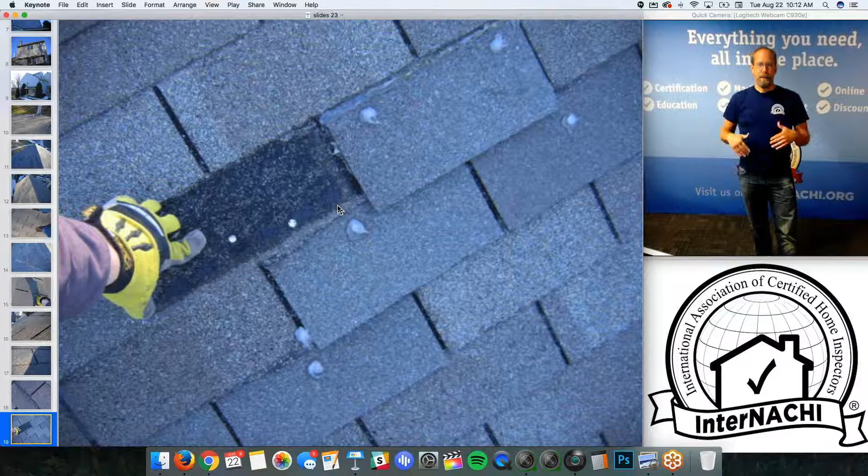As you can see, we have defects. They're not material defects, there are a couple shingles that are in poor shape, but you need a professional. So those are major defects. I'm looking for defects, and I want to make sure my client understands the degree to which the defect is, right? Material is the worst, major needs a professional, minor needs a professional or maybe you could do it, cosmetic is like a blemish.

These are major defects, and the shingles weren't even installed correctly. As you can see in that shingle, one of those fasteners was installed, well, they're not spaced appropriately. That's not where you install a fastener. You don't install fasteners 4 inches apart on any shingle, not even wind driven. And that fastener is installed in the adhesive strip, so that's a poor location of a fastener in a 3-tab asphalt shingle.

I like to communicate with pictures and video more than words. If you take a look at my inspection reports, you can download samples of them. My reports have a ton of pictures, because a picture is worth 1,000 words.

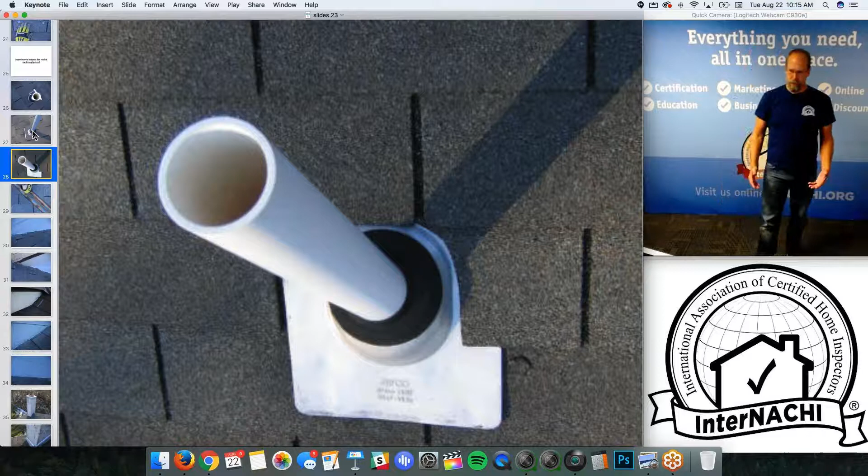So there's the penetrations - that flashing is not installed properly. If you take a look at it, the left side of the flashing jack is actually open to water penetration. There's a hole 2.5, 3 inches from that left edge of that flashing, the metal flashing. Oh, I wonder if I have a pen - I've practiced this before, but usually I'm not very good at it. There it is, cool. So right there is where I'm talking about.

So there should be an asphalt shingle tab lying over that area. It's not a really great position from the roofer of that flashing. The standing seam has a little bit of corrosion - I'm not worried about it.

The other type of flashing that you need to look at is - what did we do - flashing around the vent pipes, valley flashing, and now step flashing. Step flashing is listed in the standards of practice, and you're required to inspect for it. I see step flashing, but I also see white silicone slobbered all over the step flashing.

And when I see that, poor workmanship, something sloppy, I put a smile on my face. I know I've got a problem, and I want to figure it out as much as I can. I'm not required to diagnose every problem I see, but I'm going to try to figure out what's going on, because this doesn't look right.

So you can see the metal flashing there in between the shingle tabs, but I don't know why. If you do metal flashing properly, you don't need sealant at all.

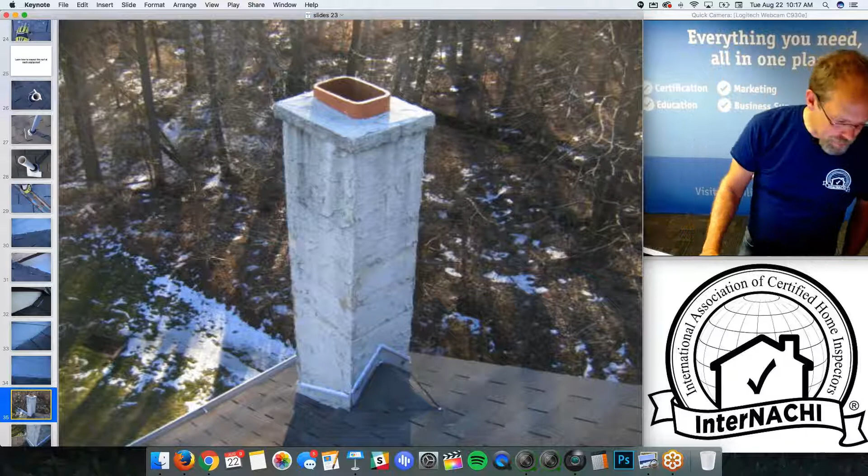We have a course on inspecting fireplaces and chimney stacks. I know that that's a fireplace chimney stack. Can anybody guess why I think that's a fireplace chimney stack and not a masonry chimney stack from a fuel burning appliance, furnace, or boiler?

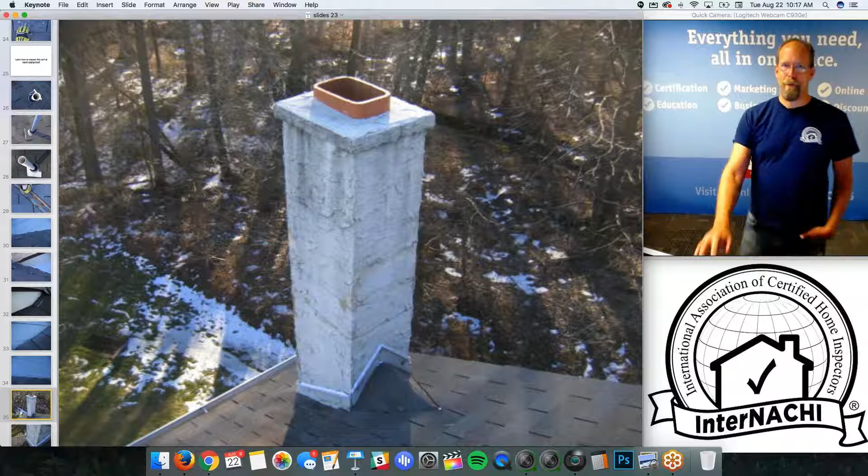Anybody guessing? No? Shelly, is it because it's over 3 feet high? No. Ceramic vent? Yeah, you're close.

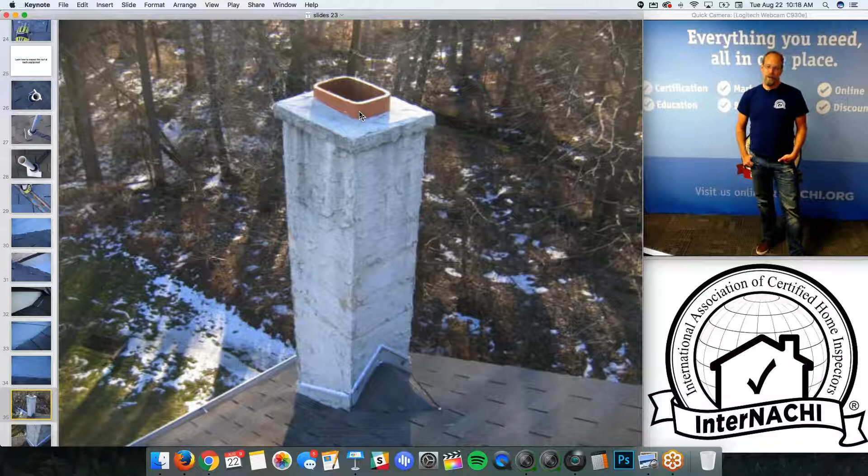Douglas - so the shape, it's actually the shape of the interior flue liner. The terracotta flue liner is rectangular, and that gives me a pretty good guess that this is for a fireplace chimney stack, just the shape of it. If you see a rectangular flue liner on a chimney stack, it could be a fireplace. This is a cold climate, so that makes sense. If it's circular or square, that could likely be a flue liner for a fuel burning appliance, a furnace, a heating system. So that's just one of the tricks - it's also in the course.

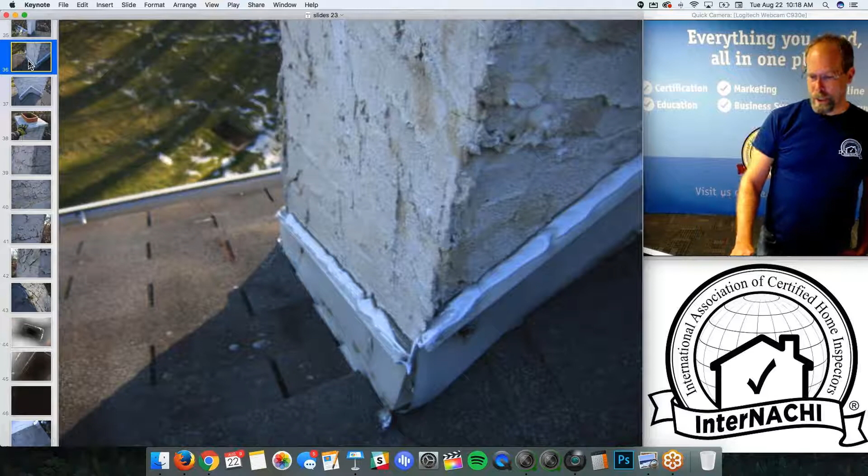The flashing is okay, but I'm not happy again with the white silicone. It doesn't even look very good. The wash or top cap on the chimney should be sloped - if it's metal, it should be sloped with a drip edge to kick water away.

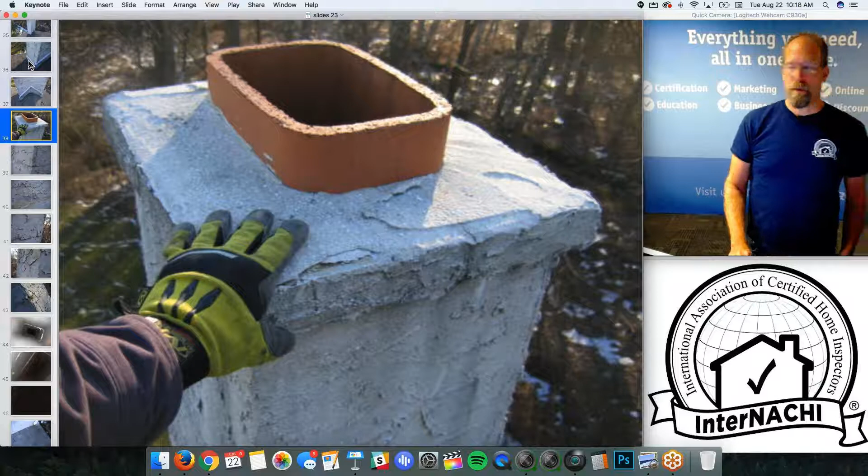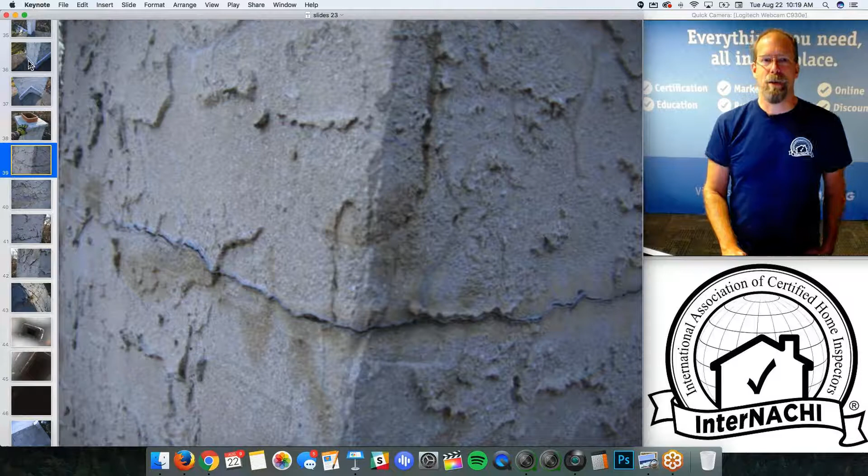There's some cracking of the masonry at the top wash, the crown, and also cracking at the mortar joints. I'm assuming this isn't brick because the cracks are about 8 to 9 inches apart, so this is probably a concrete block chimney stack. There's cracks at the mortar joints with efflorescence at each crack, and chunks of masonry popping out. This masonry is absorbing moisture through the cracks or the material itself, and through water pressure it's cracking the masonry on the outer surface, or because of the cold climate it could be freezing and cracking. Either way, it's a clear indication of water penetration, with efflorescence or salt deposits left behind causing structural damage.

So this is a major defect.

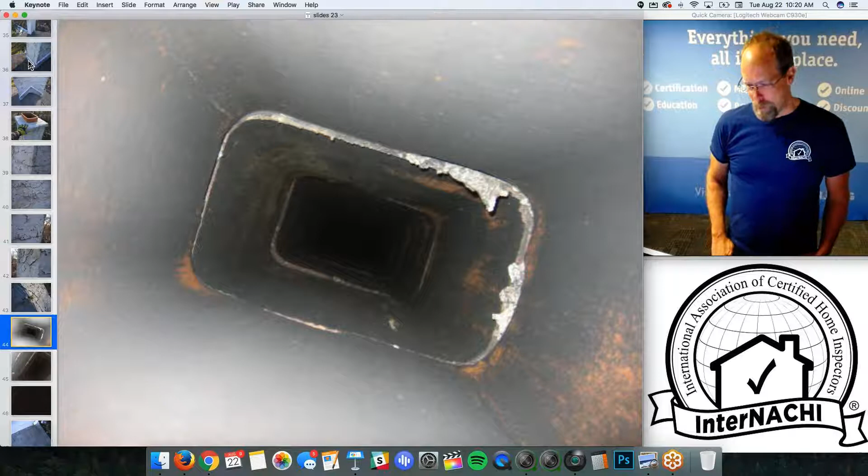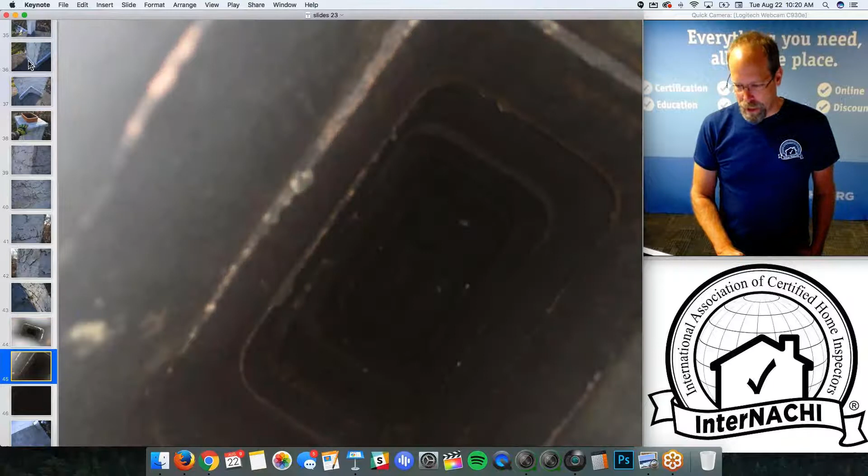The interior flue liner - you're not required, according to the standards of practice, to inspect any interior flue liner, but while I'm there I can just reach up, grab my digital camera, and snap a shot. Often I find a hole right on the side of the interior flue, or maybe a separation, a vertical crack, or a blockage. This one's fairly clean - I don't even see any soot or creosote. I try to zoom down to look at the damper or the throat of the fireplace.

So what I did was take a bunch of pictures of the roof, usually about 50 pictures just of the roof. If there's a lot of defects, a lot more pictures. For this roof we had some major problems - some shingles cracking, the chimney stack, the flashing. So I'm taking about 50 pictures, and I'll put maybe a dozen or so of them in the inspection report. I won't be able to put them all in.

I'll also do video - I used to carry two cameras, now I have software I use with my iPhone. It takes pictures and video. I take video of the roof inspection because I don't want anybody coming up on the roof, but I wanted to communicate my findings really well. So here's video of the roof.

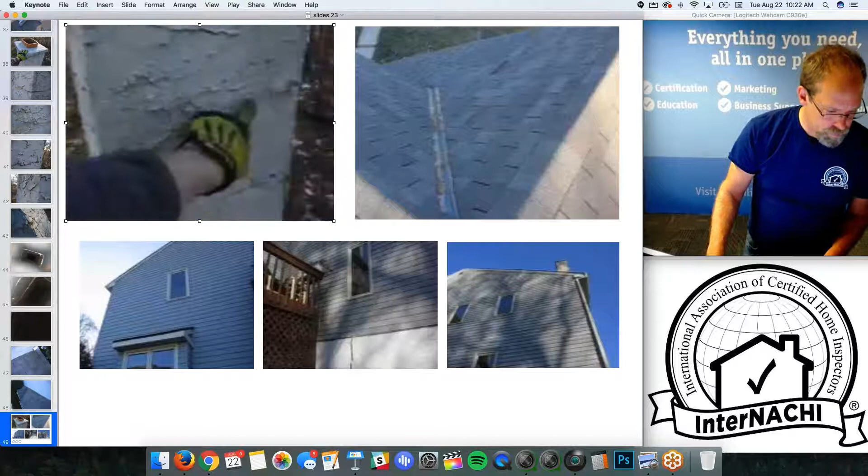There's the chimney stack - the masonry chimney stack needs some repair at the mortar joints. The stucco exterior, cement stucco, is cracking along all of the mortar joints. That could allow water penetration.

The asphalt shingles need to be repaired in several areas where they're actually missing. Looks like there's some water damage on the right there. On the exterior, there's a hole in the siding up there.

So I took videos of my inspection as well. At the end of the inspection, about two and a half hours later, I'd be in the kitchen. That's where I wind things up, get paid, and summarize everything and my findings. What I did was turn my computer around and play those videos for my client, particularly when their agent was right behind them, and let them view the videos.

After a few seconds, they realize that's their roof. They're not watching just any video, it's their video of their roof that they didn't get to see, because I don't take anybody up on the roof. That was part of my brand.

So I did a ton of pictures. I gave all of my pictures to my clients, and I did video and provided all those videos to my clients as well. Used to burn them to a DVD back then, then USB. Now it's all in the cloud with your mobile software. So you have to think about that as well.

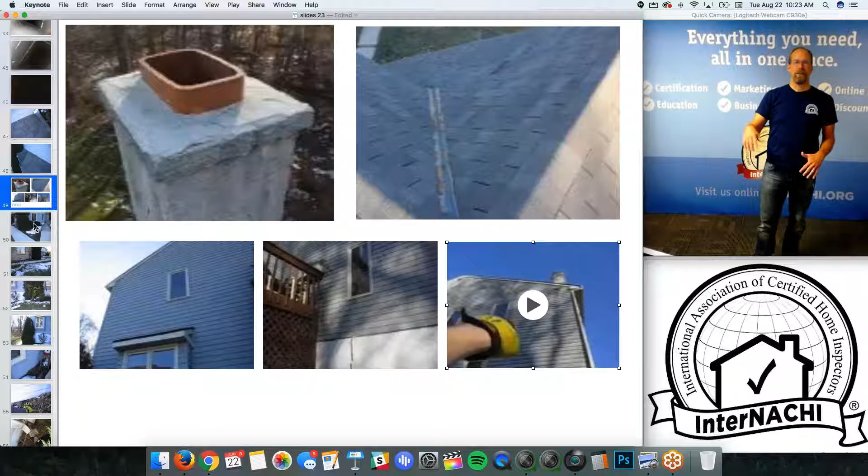Digital pictures were kind of new about 15 years ago. I think video is the same way. In about 10 years from now, people are going to expect a lot more video. In fact, I love the idea of a video-based inspection report. If you've been with me during an inspection or in other classes on software, you can see that as well. It's so easy to snap pictures, just as easy to do video.

So I'm done with the roof, right? I'm using my mobile device. I've entered my comments just by clicking and tapping the sentences that I like. Maybe there's some custom things I need to write in, like where the missing shingles are or how many. And then I'm done with my video as well.

As I write my inspection reports and take pictures, those pictures and video end up right where I was in my software. So if I was writing about the step flashing being gooped with silicone, in my software, I would take pictures as well.

And then I'm done with that inspection report. I can print it out later, I could email it, put it in the cloud, PDF it. But I'm done with that inspection. Before I step on my ladder to get down from the roof, I'm done inspecting, taking pictures, taking video of the roof, and writing my inspection report for that system.

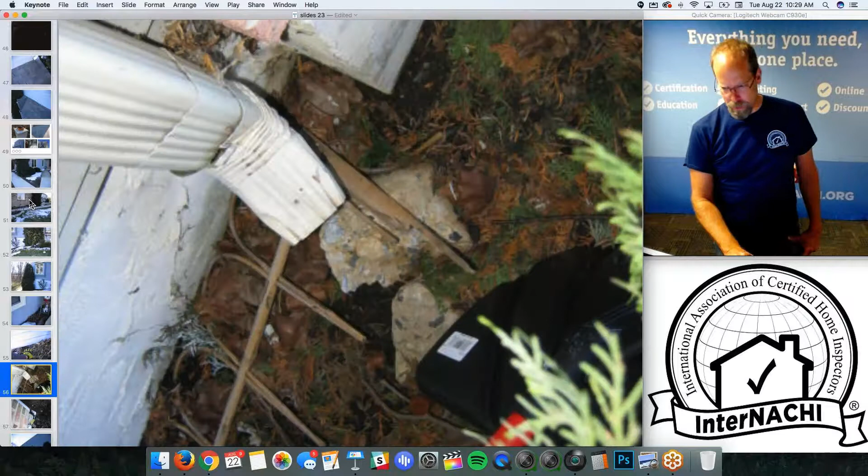I follow the downspouts. Remember how I followed the downspout from the upper gutter to the lower secondary level gutter? Well, here's the downspout at ground level, and it's not diverting water away from the house. During a typical rainstorm in Pennsylvania, hundreds of gallons of water will be dumped right next to that foundation right there.

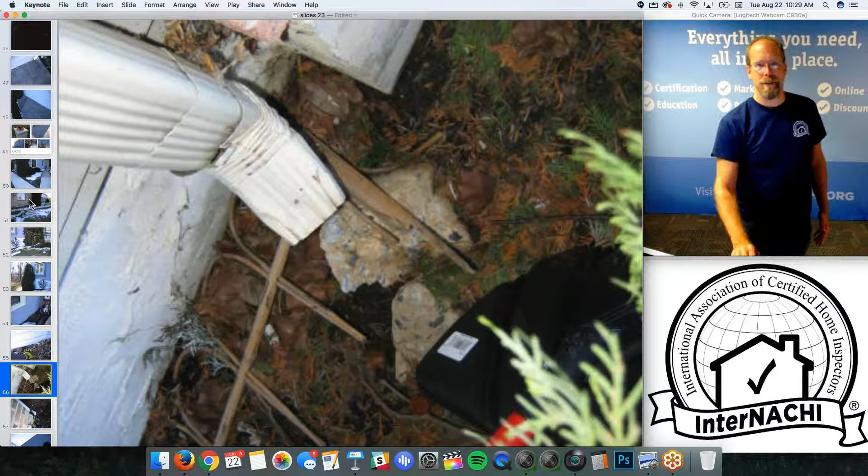So now I'm smiling, because I can't wait to get into the basement. I'm keeping in mind all the things I've found during my inspection — remember, roofing shingles totally blown off the roof. I'm going to look for roof leaks, and now I'm going to look for water penetration and intrusion problems in the basement.

And when you're looking closely, remember far back? Then you move in closer, and then really close, up to the point where you're touching things. And when you do that, you get to look at details like that — that's a pipe, about a 1.5-inch diameter pipe, going into the downspout, underground drainage pipes.

That's probably a sump pump discharge, I'm thinking, or maybe a condensate discharge. Something is discharging, so I'm going to keep that in mind as well.

And I'm looking at the exterior. Looks okay — for a 15, 20-year-old home, not bad. The siding looks pretty good. There are areas of wood rot, though, on windows that I can see, and I'll put that in the report.

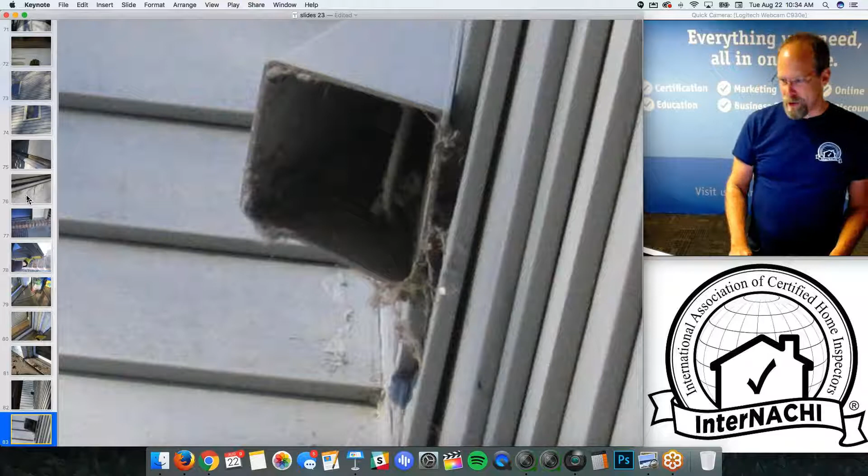Here's one: there's the dryer exhaust with a ton of lint, and it's not even closing. Often a bird will come and go right into the dryer vent and build a nest right in there.

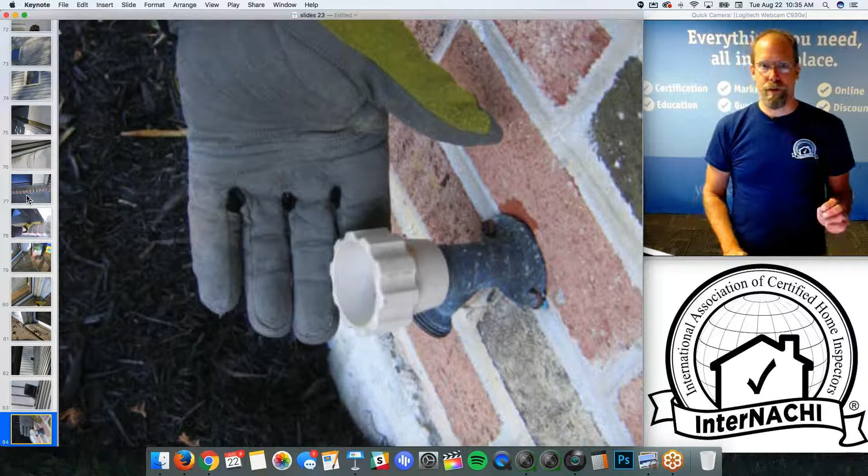Every exterior water faucet, especially in a cold climate, should be frost-free so they don't freeze and burst. Every receptacle outside should be GFCI protected.

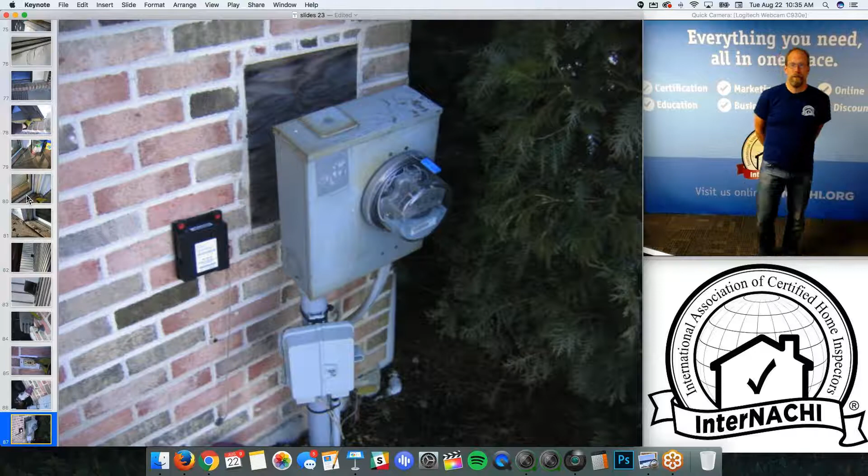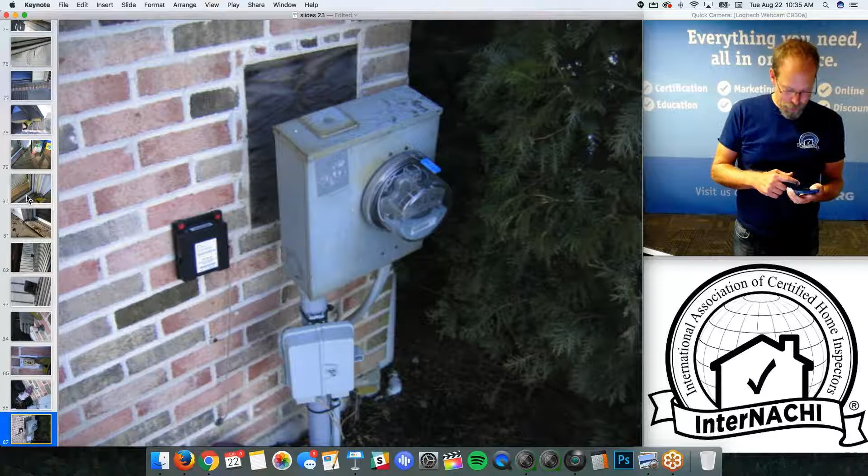Speaking of electrical, while I'm doing the exterior, a house is a system of interdependent parts—one part affects a lot of others. While I'm inspecting the exterior, another system comes up. No big deal, because I use mobile software, so with a flick of the finger I go from exterior to electrical. Now I'm organizing my software according to my inspection process. Typically on every home inspection, I'm outside doing the exterior inspection, then I flip to the electrical system, and the first thing I want to comment on is the meter.

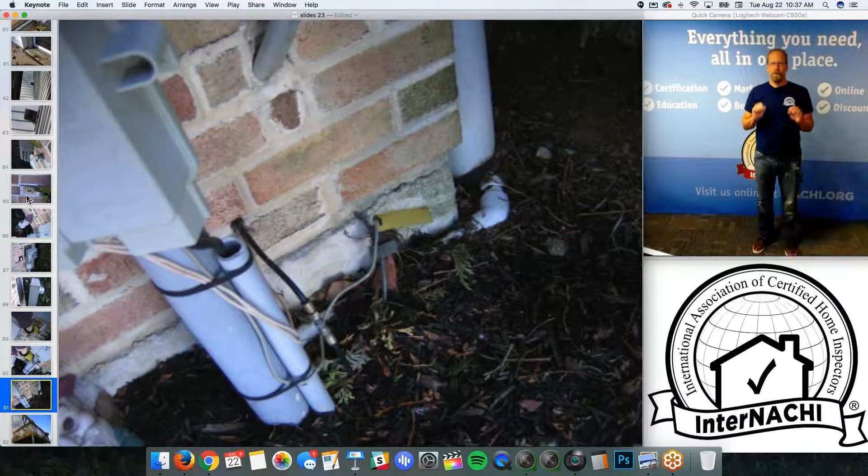Anything with the electrical system, I don't pull any punches—I want to make sure this house is safe. So this is a big defect. There's a line going into the meter, the main panel in the basement, 200 amps. There's an underground conduit which settled. We've got phone and cable. Some sealant is needed. I see a grounding wire, a grounding rod, and I'm done with that. That was probably a two-minute inspection of the exterior electrical system—a minute maybe. It's very easy.

I'm paying attention also to my time while I'm performing an inspection, and that should only take a few minutes.

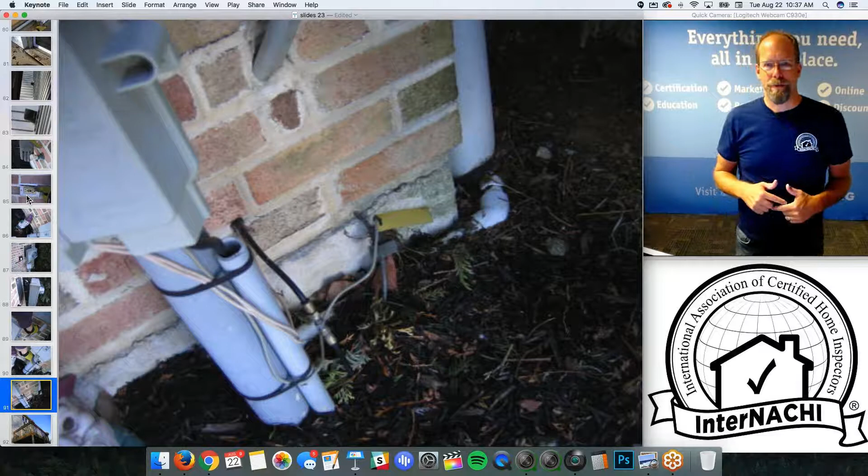Then I'm back to the exterior, and one of the major systems, one of the biggest things attached to a house is this, the deck. Often it's not attached well, and if it's not, it's really hazardous. So it's important to inspect the deck well. We actually have a bunch of courses on how to inspect the deck.

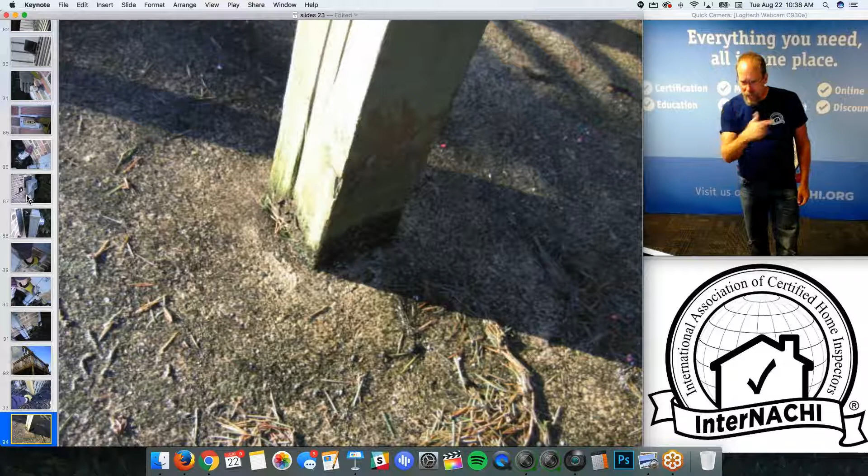The way I inspect it is from bottom up. I start from the bottom. Works perfect, I'm outside anyways, so let's poke with my screwdriver that I pull out of my tool pouch the very bottom of every load-bearing component of the deck system to look for attachment and damage. These are not attached and they're damaged. They're buried underground too. Now I'm looking for attachment to the house, and it's in poor condition as well.

You can't install a ledger board with nails. Why? Because they withdraw, they pull out. You can see a deck just pulling straight out. What you need is lag screws. It's okay, lag bolts, it's a lot better. Or designed attachment systems.

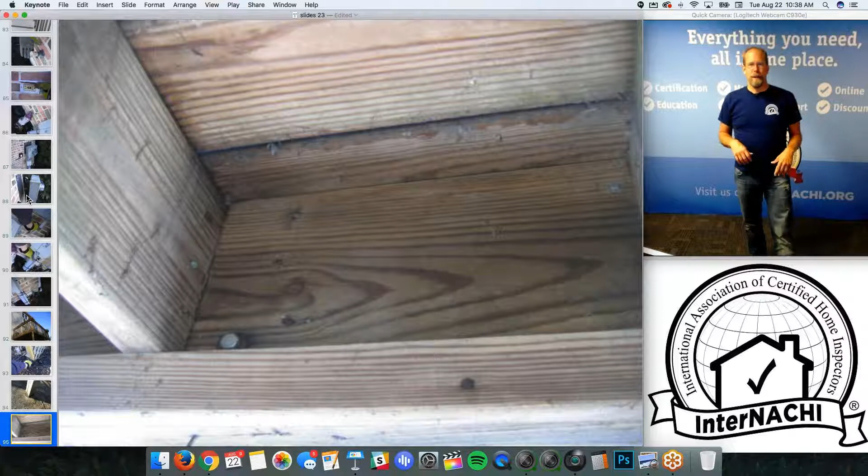You go to Home Depot and you take a look, ask for the deck area, and you can see you've got joist hangers, fasteners, lag screws, lag bolts, but then there's the best, which is a various amounts of different kinds of attachment devices to attach every joist to every ledger to every house structure. And that's the way I would build a deck.

Here we have a bunch of nails that can easily withdraw. A lot of them are rusting, a couple lag screws with small diameter heads. I bet they're not even penetrating anything of value. And there's a ledger strip. I'm not a fan of ledger strips. It's hard to attach a floor joist to a ledger strip. It's all about gravity, but decks tend to have a vector force going away from the house, not always straight down. So ledger strips are not my favorite.

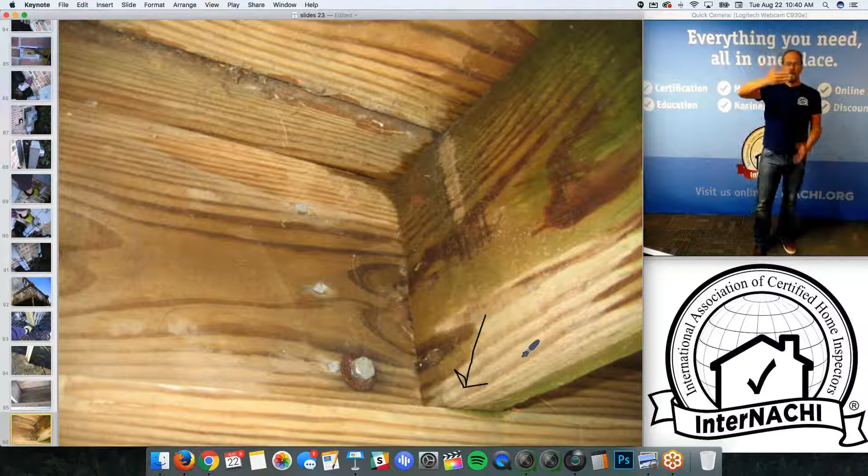But there is actually a minimum that a ledger strip needs to be, and it's violating that minimum right there. So let me use my tool. You need at least 1.5 inches of bearing. The floor joist end needs to bear about 1.5 inches on top of something. And so there's a ledger strip there, and it's barely attaching, barely resting on that ledger strip. So that's an indication of the condition of the entire system.

So we're at the material defect area here. We have lots of illustrations that you can use to help communicate to your clients through your report what a ledger strip is, for example. We have over, I think it's 5,000 illustrations available to every InterNACHI member to include in your inspection report. And this is about ledger strips.

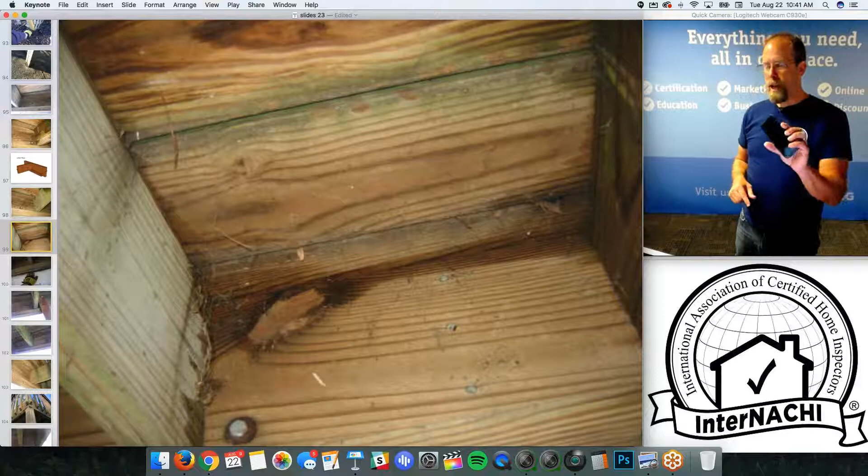So if you have a question, Phil, is there a specific report writing software you would recommend? Yep, all of the software that is available on our e-commerce partner site called inspectoroutlet.com. Left-hand navigation menu, just click software. I recommend all those. I personally have Home Inspector Pro on my iPhone because it's a mobile device, and I recommend that everybody inspect with a mobile device, mobile software. And Home Inspector Pro works on any device. Another really good one is Home Gauge, and they work on PC devices and laptops and computers. So those two softwares I love.

Can we download these examples to our iPad or iPhone? Download examples, the software? Yeah, so every good software manufacturer has free trial downloads, and it's usually like 3 months, and you can play around with it and see how it compares to other things. So that's the first step I would do. Go to inspectoroutlet.com, download a free trial of one of the software and the things that are there for you.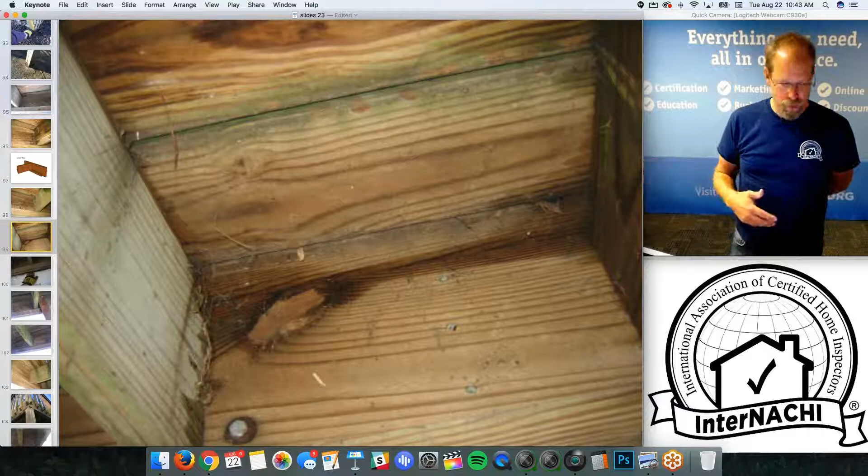For this deck, would you recommend no one walk on it until this is fixed? Yeah, so this was a deck that I recommended because we'll get to it if I ever get there. There's water intrusion through the deck flashing that's visible from the basement. So I know water is actually traveling from the siding to the deck through the house structure and into the basement. Where there's a water path through wood, there typically is wood rot. I call this an imminent deck collapse caused by poor installation and workmanship, especially at the deck ledger attachment and flashing. And I recommended no one stand on the deck. And that doesn't go over very well with real estate agents, as you may imagine.

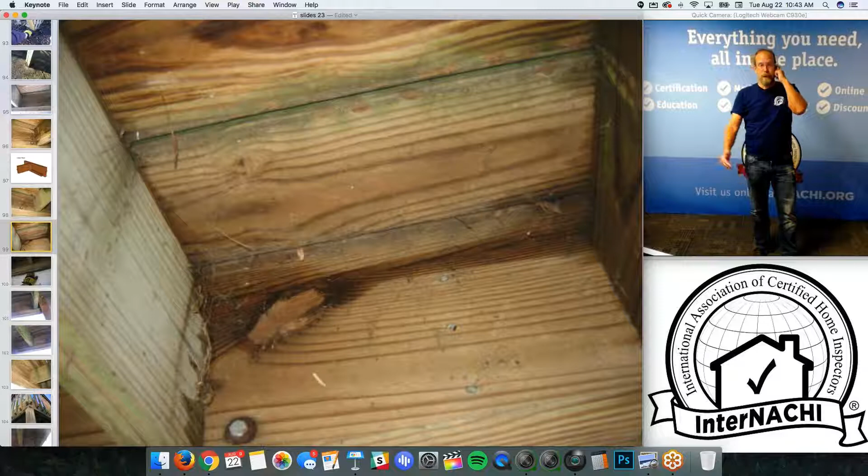I got to the point in my profession that I really didn't care. Right in the beginning, you tend to be pressured to say things in different ways and write it soft. That's fully understandable, and you have to negotiate that and stick to your guns as you become a veteran inspector and lead other inspectors. But you get to the point where you really don't care what anyone says, except for your client.

And you're always performing your inspection to the benefit of your client, so you don't pull any punches. I really felt that this deck was not safe for anyone. I wouldn't let my family step on it, so I'm not letting anyone else step on it either. You can see that there's a lot of wood rot.

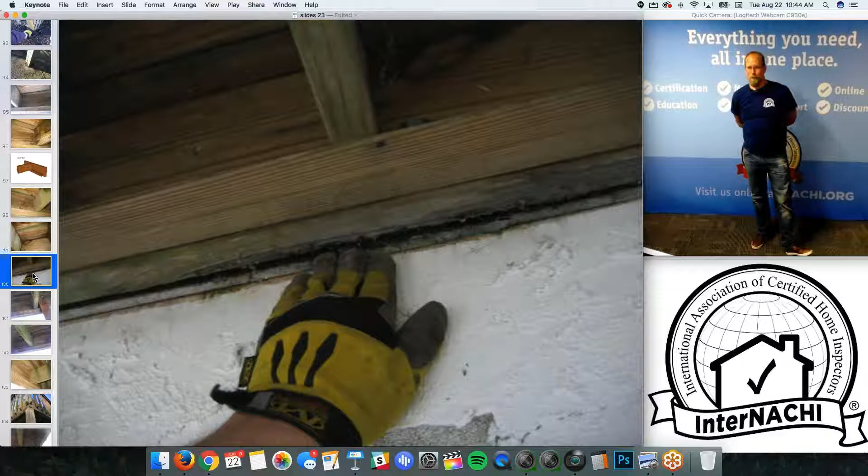Good, I'm being observed today by James. James is in our room, he's watching me. I'm very nervous.

You can see that there's been water going behind the deck ledger right here. So I'm still on the exterior, right? And now I'm underneath the deck, haven't even gotten up on the deck yet. And that's...

It's like wood rot—it's not wood rot, it's... there's a term I used to use, it'll hit me. But it's like junk, like wood junk that comes from debris being carried by water behind a flashing or siding or a ledger board. It's like a dark, moldy kind of stuff, and it's an indication that there's been years of water going in areas where it really shouldn't be. That's a really great indication.

If you inspect with your hands, you tend to find things that other inspectors might pass over because they're just going too fast, right? So inspect with your hands all the time. I want to touch just about everything—that's why I wear gloves. You can see all my gloves wear out in a month at the fingers, because I'm touching everything, sliding my hand on everything. That's another tip that I would give.

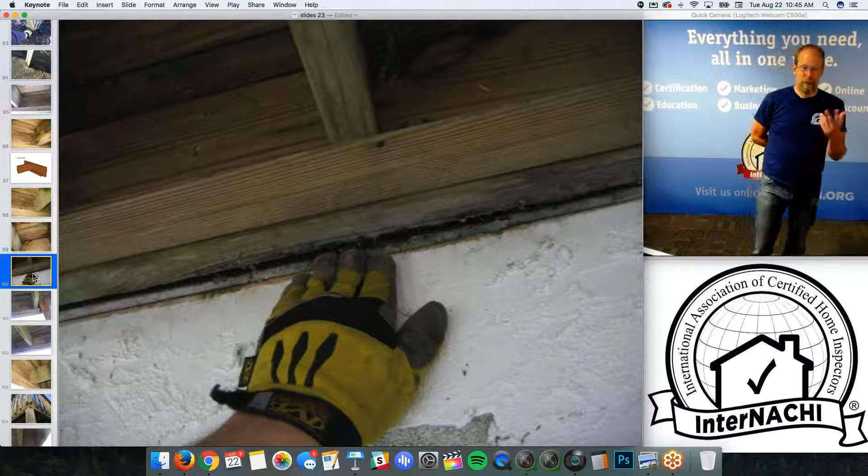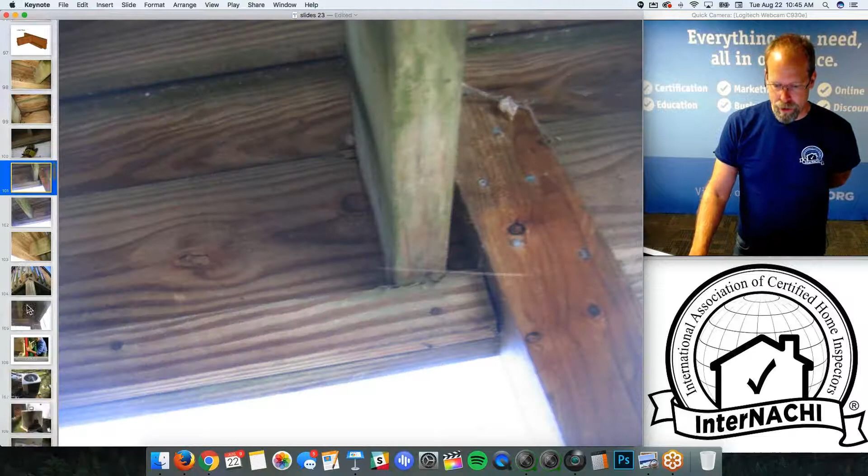Inspect with your hands and then take a picture of it. If your hand isn't in the picture, you won't understand the scale, and your clients just won't understand what's going on. So your hand in the picture is a really good way of communicating.

A lot more problems with the deck. I did a deck flashing video, it's about 15 minutes, and as you can see, I colored every component of a proper deck flashing. It's all about lapping in the right direction to divert water away—they need that water kicked out. So there's a really great video I would recommend, it's a short one too.

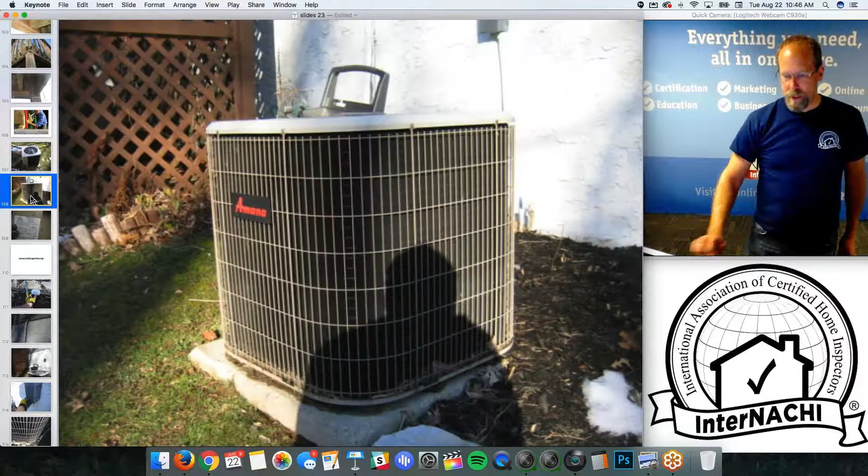On to the next system. I'm inspecting the exterior, but here comes, looks like an air conditioner unit. It's okay, I'm using a mobile device, I flick over—I don't have to put this all together eight hours from now, I'm doing it right now. I'm taking pictures and writing my comments.

And this looks like a compressor unit, right? So I can see the manufacturer—its manufacturing plate is there, the model number, the manufacturing number, and the serial number. Serial numbers are used to date it, model numbers are used to size it.

And I like these folks, I've been referring to them—I don't even know them, just came across it. It's building-center.org. I went there recently and they're updating their entire website, so give them a chance to update everything. But it's a fantastic resource. There are other resources too, like online books and actual printed books that list every hot water tank source and every furnace and air conditioner by model number and or serial number, and they give the date of manufacturing. So if you're really into figuring out how old the system is, go to building-center.org.

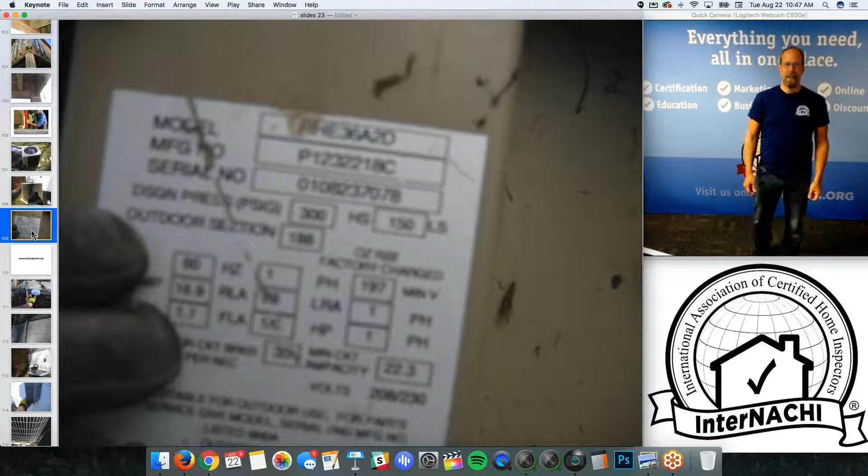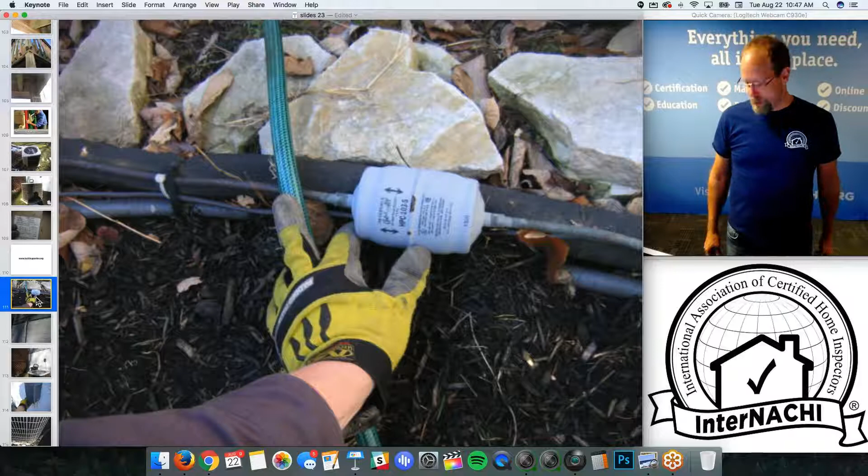You look for Amana, because that's the manufacturer's name, and then you type in the serial number and you get the actual date that unit was manufactured, down to the week, month, year. That is far exceeding the standards of practice, but I often did it for clients who actually requested it. So if you had some question about the actual age of the system, I tried to find that out for you. But usually I told my clients, within my contract and in my inspection reports, that I'm just guessing the year.

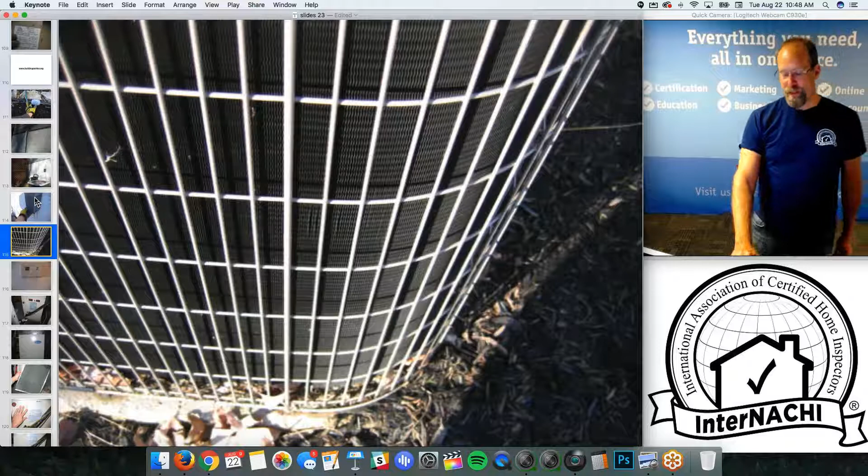So there's the refrigerant line going from the compressor to the air handler on the inside. Electrical shutoff switch is in sight, that's good. And the fins of the coil are good. And that's it, I'm done with that. That was a couple minutes of inspecting.

Now I'm inside and I'm doing the heating system. My client is ideally with me. If they're not, I'll circle back and take them through it. I want them to know how the furnace works.

And it turns out this isn't a furnace, it's not an air conditioner either, so it's a heat pump. Oh, I knew that because of that. Does anybody know what that is? And why? What is the clear indication that this is a heat pump?

While you're answering, Rob asks, can you comment on using a drone to inspect the roof? Yeah, no, don't do it. Drones are for fun, there's just so much liability. I don't recommend it.

The reason is, well, I live in Colorado, and around here you can get a gust of wind of 30 miles an hour without you knowing it. I mean totally unexpected, and that'll take your drone into someone else's house, or into a tree. So that just doesn't work where I live.

I was in Florida flying drones too, and it doesn't work down there either. A nice calm breeze of 5 to 7 miles an hour is too much for me to handle with the drone. It has to be absolutely perfect weather, it can't be raining either, right? And cold weather affects the batteries as well. So these things are really just for fun.

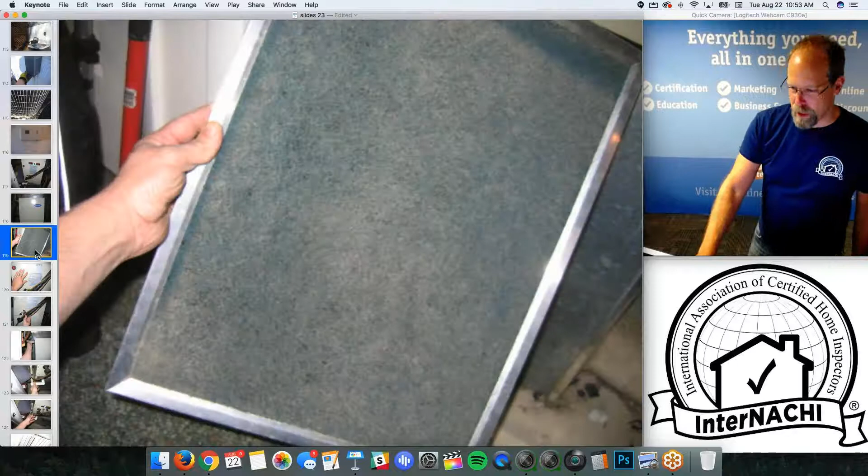Sometimes I'll pull out my 6-in-1 screwdriver set, pull out the Phillips, and take the screws out. I love seeing that coil if I can. So I'll pull the cover off and look inside to see if I can see the coil and maybe take a picture of it. I also like to see the evaporator coil tray - sometimes those trays are just filled with gunk and corroding away. The air filter is low efficiency, poor quality, washable, and dirty.

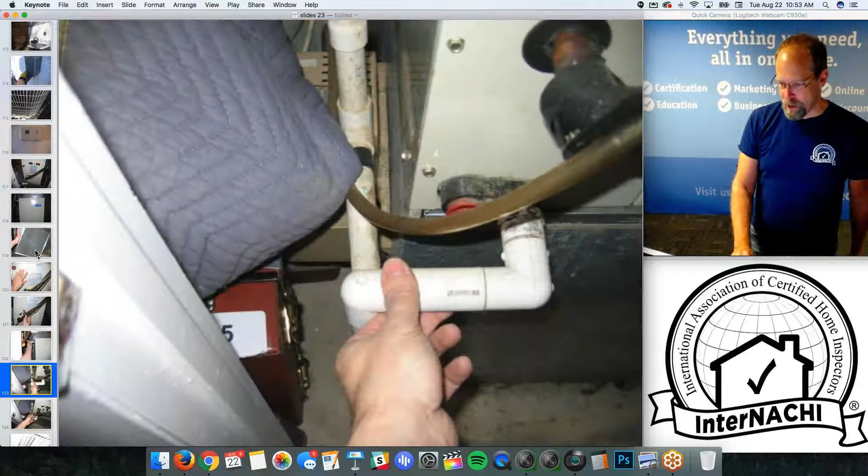There's the manufacturing plate, the refrigerant lines, the electric lines, condensate, and a discharge tube from the sump pump. The basement is conditioned somewhat, but it wasn't designed originally for that - someone just added some ductwork and ceiling tiles in the basement and some finished stuff. So that's the heat pump system in about 10 minutes.

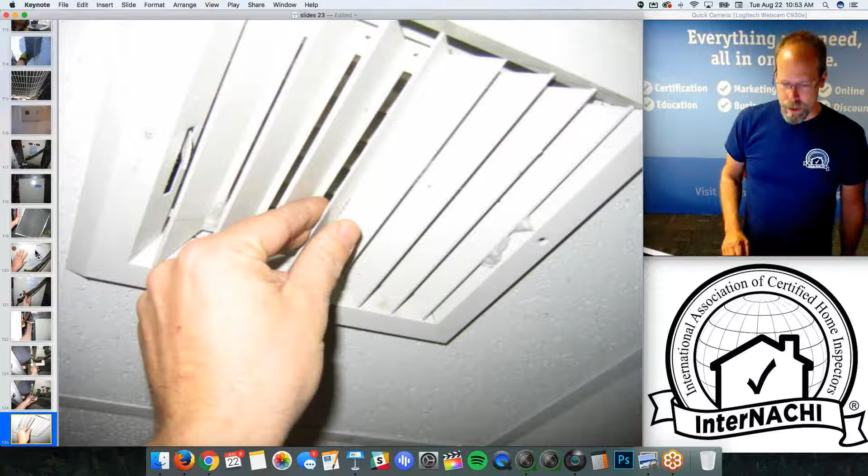Some areas, like Texas, require you to measure the actual delta T, the temperature of the air coming into the unit versus the temperature coming out. It needs to drop or be different, it needs to heat up or cool off.

Now I'm looking at the main water coming in. I think of water supply, either a private well or public line. This is public water, with the shutoff valve, water meter, and distribution pipes going to the hot water source. I'm also thinking about the drainage system, the sewer waste drain going out. Water coming in, water coming out.

And there's the water meter, the bonding wire. There isn't a jumper cable. There's supposed to be a grounding wire, a jumper wire jumping, clamped on either side of the water meter.

And while I'm there, I see water penetration, obviously. Those are CMUs, concrete masonry units, concrete blocks. They're porous, like sponges, and very easy to use. I've built homes using them, but if you don't waterproof the exterior of the foundation, you're going to get water intrusion. So there's active, wet water intrusion coming through the foundation wall in certain areas, including below the main water source.

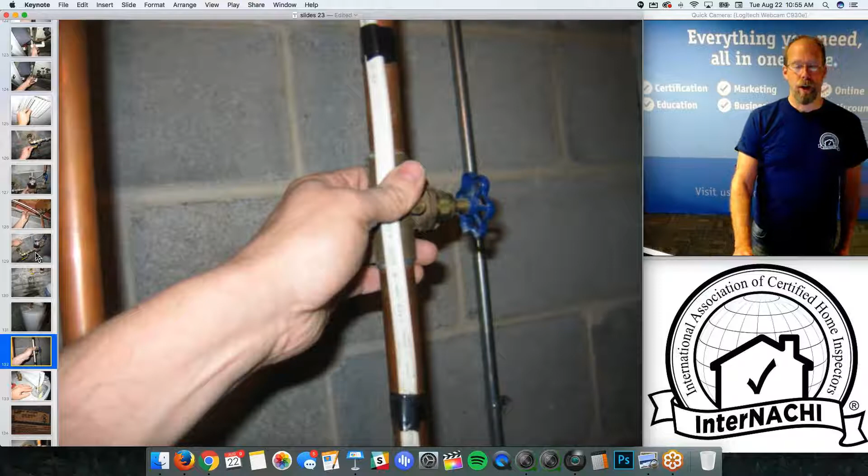Hot water source, electric hot water tank, cold water coming in with a shutoff valve. That's electric, I like to look at the wiring to make sure it's grounded. There's the manufacturing plate, maybe I can get a date, at least the size. Discharge from the TPR valve extended to the floor.

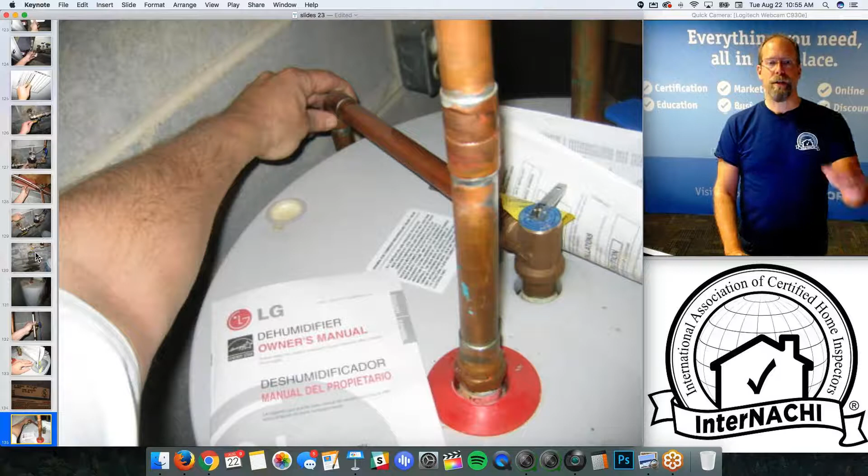Done with that system. Electric system now: here's the electric main distribution panel, main shutoff switch at the top. I'm going to use my fingers to designate if it's 100 or 200 amps - it has to be at least 100 or 150. And I want to make sure that the labeling is full. Can't tell if it's accurate.

I'm not going to switch all the breakers to make sure everything's accurate, but I'm going to make sure every breaker is specifically identified. And I don't have to take the cover off - you're not required to remove the dead front cover. But if you do, that's what it looks like. I do not recommend you do that.

Don't exceed the standards of practice in this way if you're not trained to do so. You need gloves, you need to be standing in a safe area, you need clearance, safety goggles - not really concentrated on preventing high arc flashes, but there could be an arc, a spark. So I don't recommend it, but I always did it. I exceeded the standards of practice for every client.

And often when I did, I got to see defects I wouldn't normally be able to see. That's a double tap, on the basement circuit. The house was originally built with an unfinished basement. They finished the basement, someone put some wiring in and stuck a wire into a 15 amp breaker. It's probably not supposed to be there, and there's no building permit or electrical inspection sticker either.

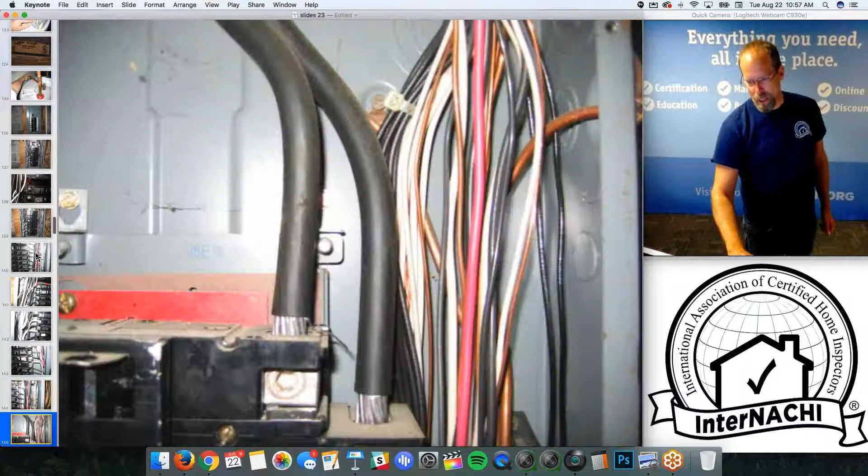I'm looking for overfusing, where you have a big breaker on a small wire. I'm looking for anything that's melted, water intrusion, debris, spray paint, anything cracked or damaged. I'm looking for grounding and bonding connections. It all looks pretty good.

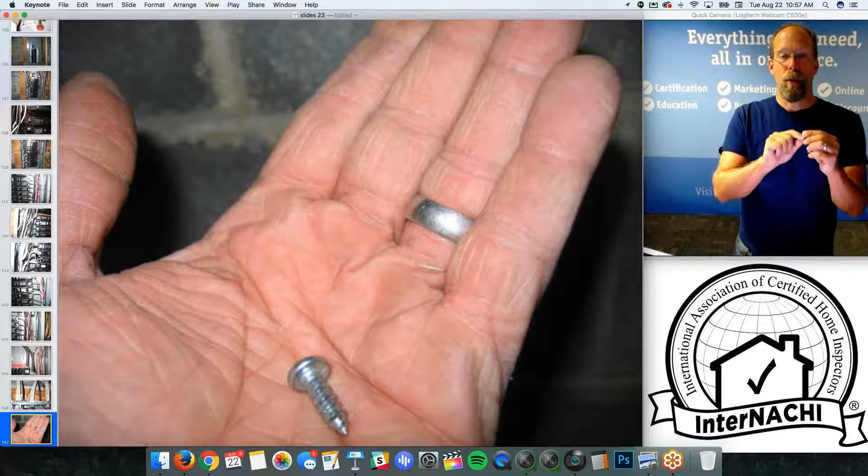There's a screw - a metal screw was used to attach the dead front cover, so we don't like that. That tip can cut into a wire and cause a lot of problems, so we don't want that. Not bad overall.

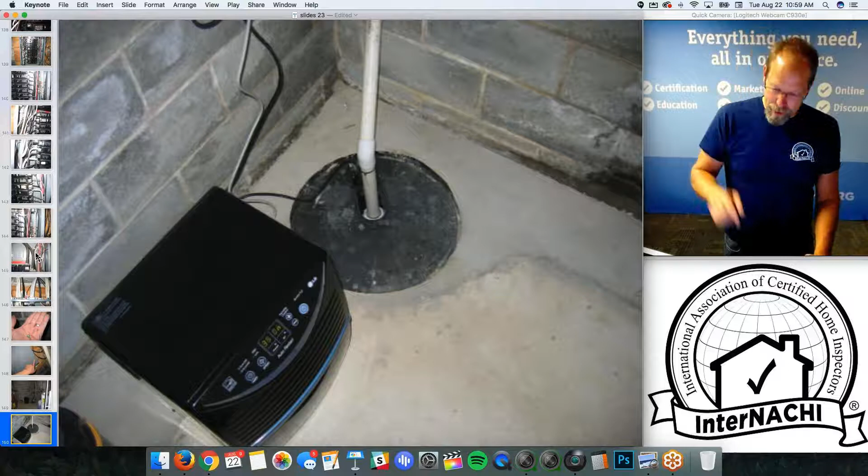If this is a home inspection and the sellers are going to move, they'll probably take that dehumidifier with them, right? If my client wasn't there or we didn't do a home inspection, my client may move in not realizing the water issues in the basement because the dehumidifier isn't there anymore. So I want to make sure that dehumidifier, even though it's not a permanent fixture, is part of my report, because even though I'm not required to measure humidity levels, it's an indication that we have water intrusion problems in the basement.

If there's a sump pump with a manual float, I'll grab it and make sure it kicks on. There's a check valve on the discharge pipe, and we saw the discharge pipe outside, right? There's also standing water in the sump pump too. I want to mention that.

This is wintertime, by the way. I forgot to mention, you may have seen the snow outside. So we have water penetration in the wintertime, and there's snow outside, so it wasn't a rainstorm.

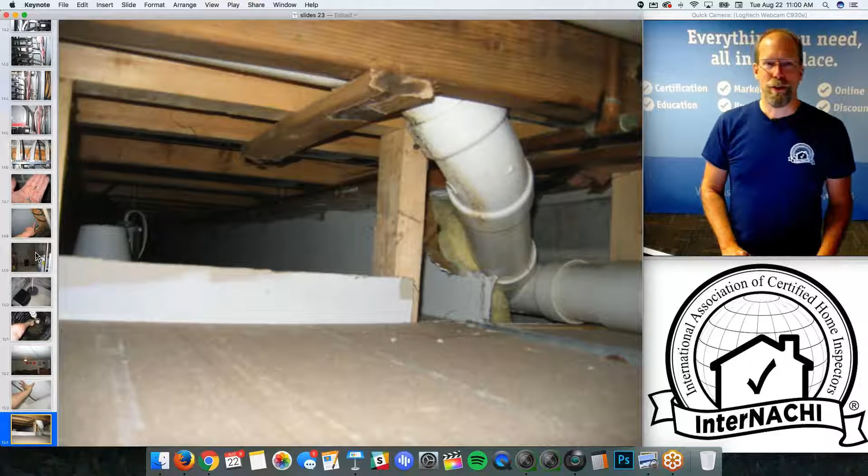You're not required to lift any ceiling tiles and look above or move insulation. But when I see a watermark on a ceiling tile, that's where I have a lot of fun. I move the ceiling tiles and inspect why there's a watermark, and it was from this water leak in the past. So something from that 4-inch sewer pipe was leaking and dripping on the ceiling tiles of the basement. I want my client to know that, and it's not wet now.

I carry a moisture meter, also an infrared. I use infrared on every inspection as well. I used my infrared camera to see things, and I increased the value of my service, so I increased my inspection fee. And I beat my competition because using infrared and moisture meters helped distinguish myself from everyone else.

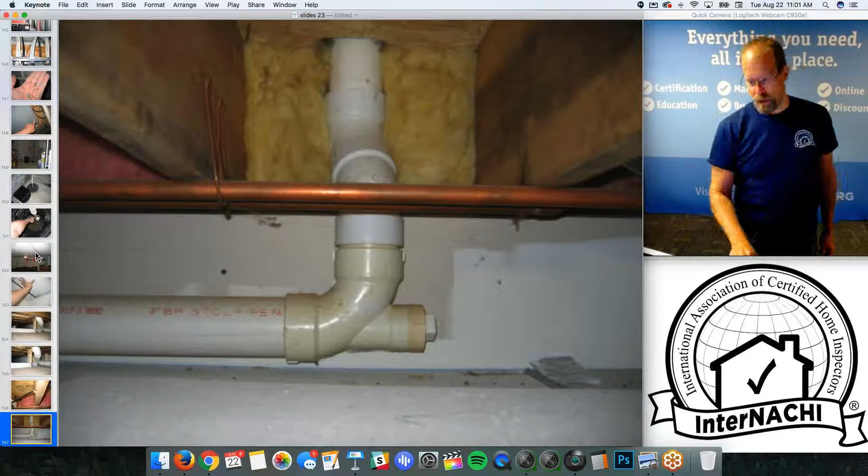If you get really detailed, like I did, I opened and closed every door, not every window, but every door, just to make sure that they open and close and lock and unlock. And the closet door wasn't all that great.

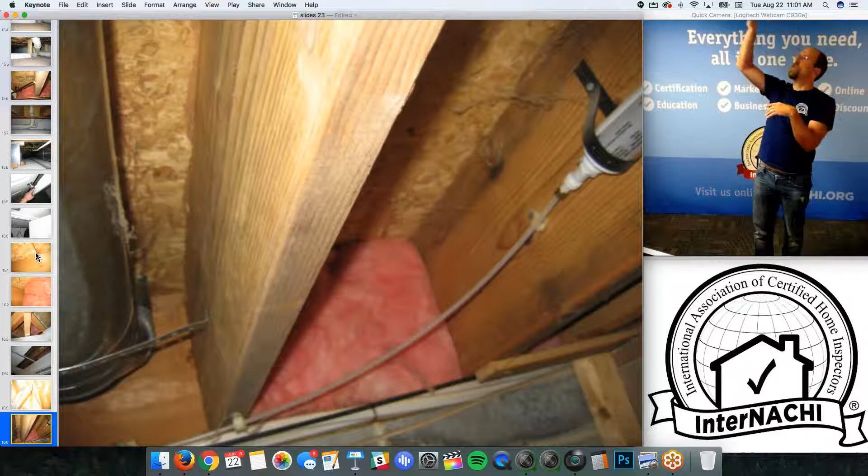I'm moving insulation in the ceiling of the basement, in between joists, along the band and rim joists, and in other areas. I use a gardening tool, a 3-tine hoe. One I bent straight, the other was kind of bent, and the other was really hooked. With those 3 combinations, I could do just about everything, move things around and put things back.

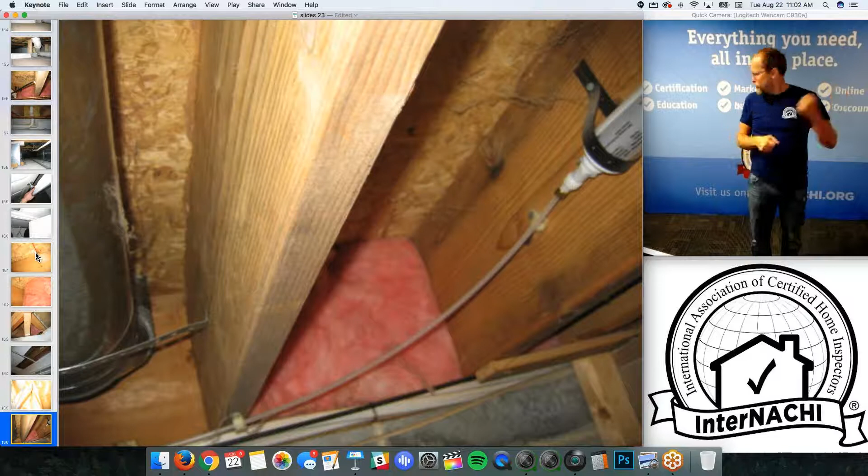It was extendable - I should have it with me. It went from 2 feet to 4 feet, so I was able to collapse it and carry it, then open it up and reach just about everywhere I wanted to.

Floor joists look great. Moving more ceiling tiles, I finally get to the deck area, and there's the deck. This is the floor joist near the deck on the outside - missing flashing, water intrusion. So it's just an indication that we have a major deck problem. I want to take pictures of the finished basement because I can't see everything.

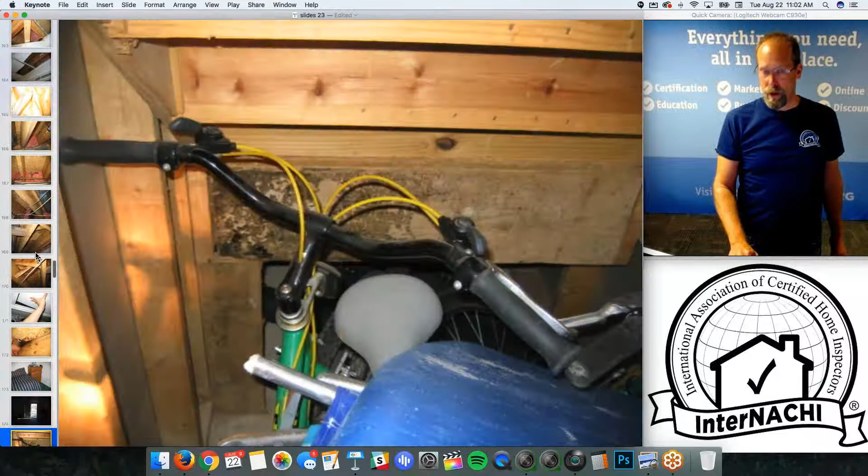I'm not moving furniture, not lifting carpet, not moving personal items. We have water intrusion here and there. There might be mold behind that area, but I want to make sure my client knows I can't see everything, and there are inspection restrictions, which are reasonable to report, like that. I would love to crawl underneath the stair landing, but I can't get there - because of that, all that stuff is in my way.

And we also have a ton of fish tanks, a half a dozen fish tanks. I don't know what was going on - they're all empty, but it's another indication of a lot of humidity and moisture in the basement.

This is a tool they no longer make - kind of like my gardening tool. It's an extendable moisture meter with 2 prongs at the tip, and it gave an audible readout. It used to beep if it sensed moisture.

And there's a clean out for the sewer. Tested the receptacles - there's the basement bathroom, toilet, sink, GFCI.

That's it, now I'm in the attic. So in my head, I'm scheduling the rest of my day when I get into the attic - that's how I think, because I'm done with the major systems. What do we do? Roof, exterior, heating, cooling, hot water source, water coming in, water coming out, electrical, structure. And then I did a basement kind of thing where I looked at the insulation, the water, the ceiling tiles, and the bathroom downstairs.

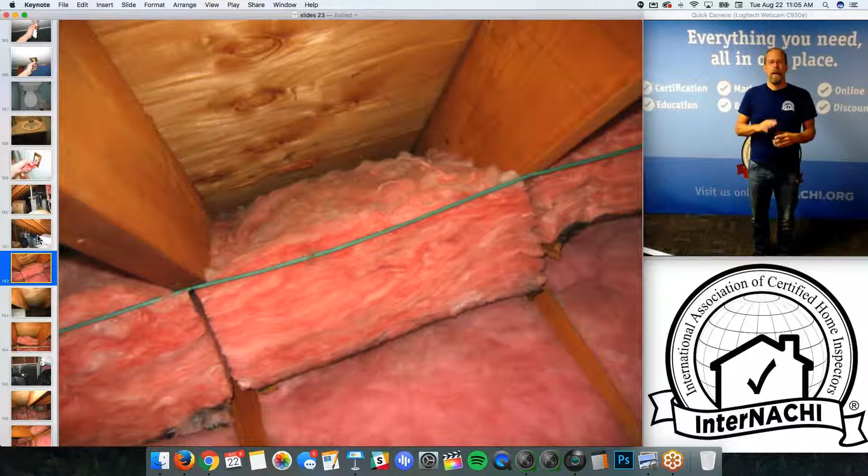So I'm in the attic, about an hour and a half in, with about another half hour of work left. The entire house, right? You'd think that's the biggest system, but it actually isn't. The attic is pretty easy. Then the interior: representative number of windows, doors, receptacles, lights, smoke detectors, floors, ceilings, walls. The bathrooms I collect all in one section in my inspection report, and then the kitchen. If there's an attached garage I'll do that, but there isn't one here, so it's even faster.

So what I'm going through in the attic is structure, signs or indications of water intrusion that I observe, and insulation—structure, insulation, water. And other things, like electrical, I'll comment on. But things like this, again, I can't see everything because of the inspection restrictions.

And am I required to find—I have a question for you. Is a home inspector required to find every defect in a home? So if there are, let's say, 10 defects in a home, is the home inspector required to find those 10 defects? Right, correct, Shelley, no, correct.

You guys are awesome. So you're required really to report upon every defect that you observe and deem to be material.

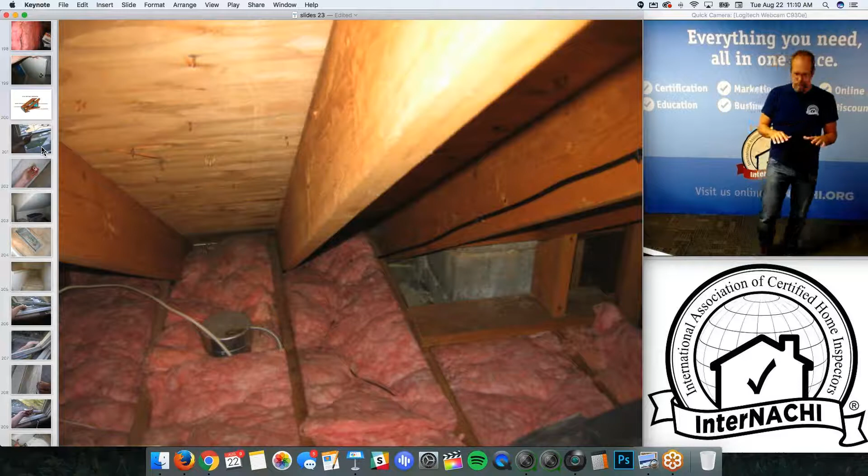So if you don't know what to inspect next, you just go to your software, and your software should reflect the standards of practice. If you have all this continuity between the standards of practice, your training, your software, your inspection process, your inspection report, your home maintenance book, you have continuity, and any defect that pops up will stand out so fast because you're using a system where everything is the same. The standards are the same, the inspection process is the same, your report writing, your software—and defects tend to just pop right out, right? Because you're doing the same process, and it's like tripping over a rock on a sidewalk. Everything's nice and smooth, but the rock is just so easy to pick out.

And those rocks are defects. So stick to the standards of practice and an inspection procedure that is consistent. So there's my attic—we have a knee wall. Knee walls are awesome.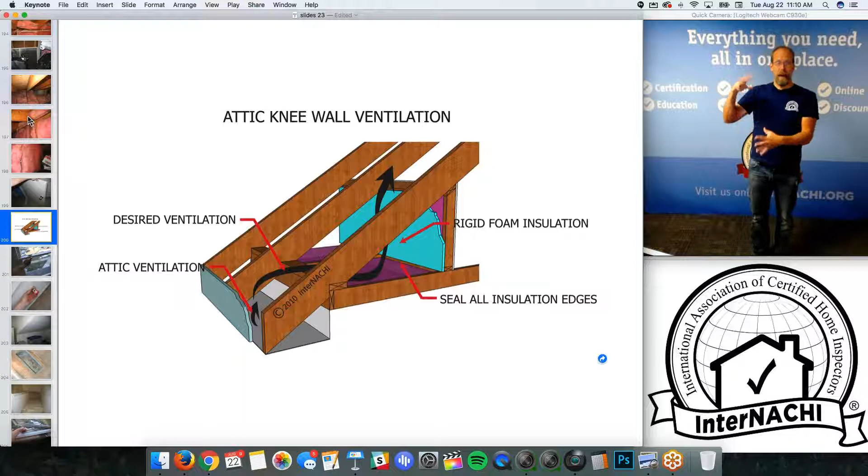They need to be insulated well and also sealed so that ventilation doesn't come actually through the attic space, but stays where it should in the unconditioned spaces, right? So ventilation is continuous and flowing, and it has no effect on the interior parts.

So there's a finished part of the second floor that's going to an unfinished attic space. This is a cheap little attic access door. It's not insulated, it's not sealed, so it's leaking air. It's essentially having an open window in the middle of winter. Imagine the middle of winter in a cold climate, snowing outside, and you just open a huge window and let it stay open 24 hours a day. Yep, that is the effect that one of these doors can have on a house.

I inspect every window and door that I can reach. It's pretty easy, unless it's a huge house, like a 4,000 square foot house, then I'm doing a representative number. And when I come across something that's wrong, a tip is to just cross my fingers, and that means something's wrong, like an X. So that lock is damaged.

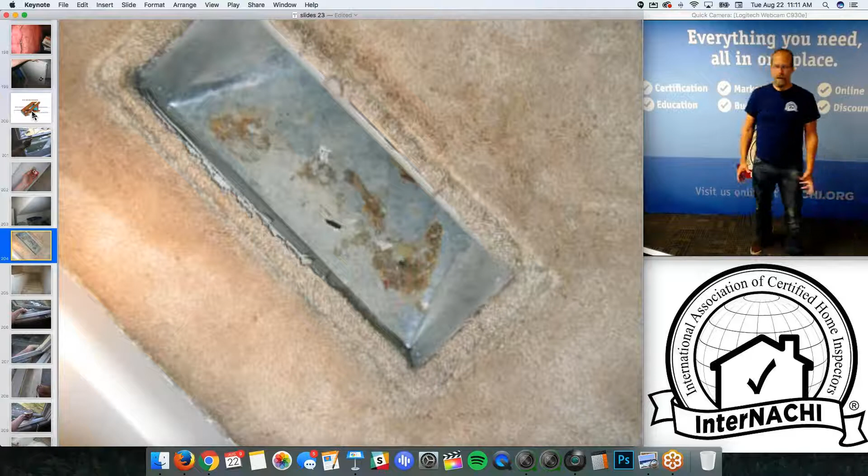When there's a furnace and ductwork on an existing home, I love to open up the floor register, stick my hand in there, and grab some stuff. And I often find the original construction sawdust and nails that the folks just dumped into the ductwork. And the ductwork has never been cleaned. And then I tend to make that recommendation.

I look for handrails. Handrails should be grippable. Imagine you're a grandmother trying to navigate these steps without holding on to anything. Impossible.

Remember that window that I couldn't touch from the exterior? Well, I'm here now because I remembered where it was, and it's rotten. And there's wood rot in my hand. A lot of people say, well, now you've got to buy that window because you just put a piece of it in your hand. Nope.

If I break something during a home inspection, guess what I do? I take a picture of it and put it in the report, because I'm expecting someone to congratulate me for finding that problem before they did.

Ever squeeze that soft brass, chrome-plated sink trap in a bathroom sink? I love squeezing those, they just crush. Well, first thing I do is take a picture of it and put it in the report, right? It's a good thing I found that.

Ever test a garage door and it falls apart, pops right off the rail? We've done that before too. It's a good thing I tested that garage door and it popped instead of having it fall on your head or on your Corvette, right?

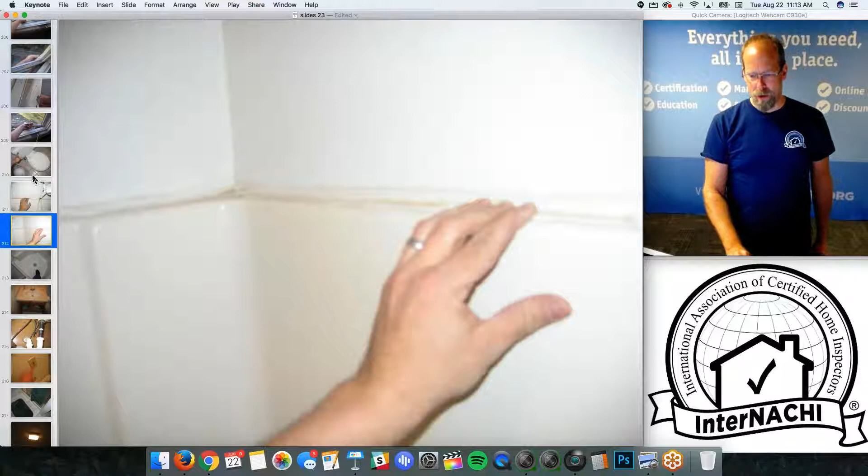Flush the toilets, run the sinks, the showers, looking at the tile, the floor, step in the plastic fiberglass shower surrounds especially. Sometimes the floor wasn't foamed up or supported really well, and it cracks underneath your feet. Those are kind of fun. If it does that, then the drain is probably leaking.

Underneath the sink, I love taking pictures underneath the sink. I want to see hot and cold water, shut-off valves, and a P-trap. GFCIs in every kitchen, in every bathroom. I want to see every bathroom exhausting outside.

We only had one exhaust hood. Do you remember? It was the dryer exhaust hood outside. No other exhaust hoods. Well, how can you have 3.5 baths in a house and not have any of them exhausting outside?

So back when this house was built, they were built to code. Nowadays, this is a problem, right? Every bath fan should be exhausting outside. Every kitchen should be exhausting outside. Every dryer should be exhausting outside.

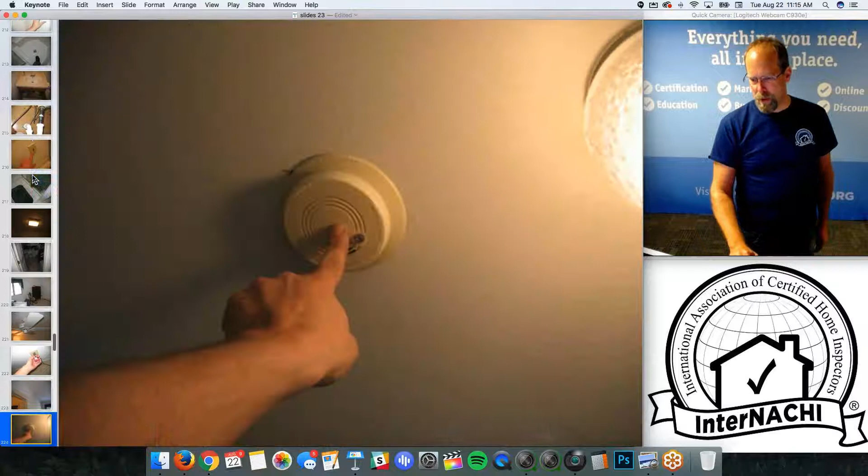Interior fans, receptacles, there was some patching of the drywall there. Any smoke detector that's yellow in color should be replaced with a battery backup.

Second floor laundry, wish I had one. If you do, the clothes washer should be resting in a pan, a catch pan, just in case it leaks. And they sometimes do, the gasket or whatever, especially on old units.

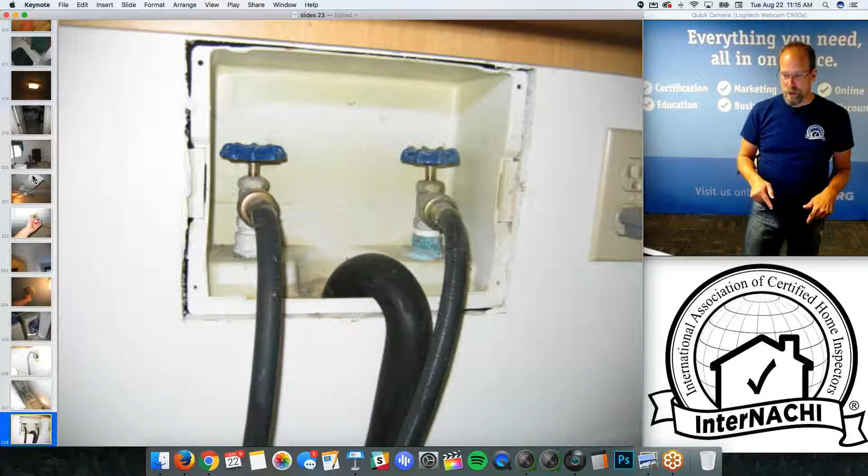And then that's the electric. That was to code back then. Now it's 4-prong, remember? The dryer vent pipe is okay, but it's clogged or very dirty on the outside, so we want that cleaned. The pressure hoses, they should be pressure tested, braided mesh hoses. These are not, those are cheap ones. And there's the crack in the pan underneath the clothes washer.

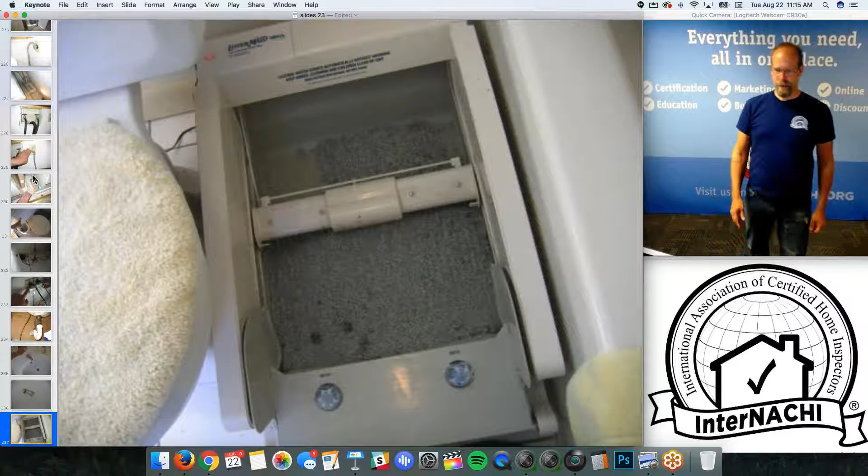Second bathroom, same as the first. Bathroom takes a couple minutes. There's a cat in the house. I want my client to know that.

So I take a picture. I couldn't find the cat, so I took a picture of the litter box in the bathroom. I want them to know that if they move into the house I inspected and it's empty but smells like cat urine, I've informed them I observed this indication of a pet. I have cats myself, I love dogs, I have dogs. It's nothing against pets, but I want my client to know that's the condition of the home when I inspected it, and when they move in they may have a reason to replace all the carpets. I'm just saying.

Interior pictures, pretty easy. I love inspecting the ceiling beneath the second floor bathrooms. You shine your flashlight - Inspector Outlet has these high lumen flashlights. I like Inspector Outlet, that's the only place I'd recommend shopping. If this was a ceiling, I put my flashlight up against it. This is a wall, you can do it for a wall too, shine it like that. You can adjust these and make sure... oh, not this one, huh? My other one, my pin one does. It's easier to see defects in the ceiling below a bathroom if you do that, and if there was a leak or a patch it just pops right out, unless the plasterer was really good. So that's another tip.

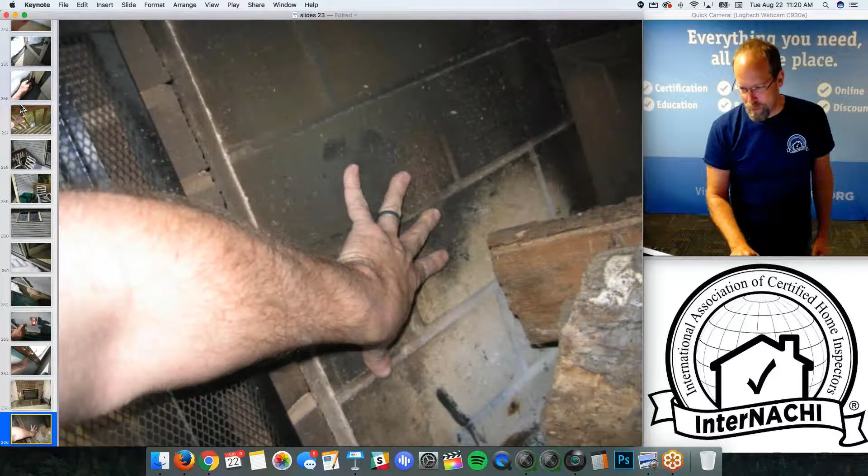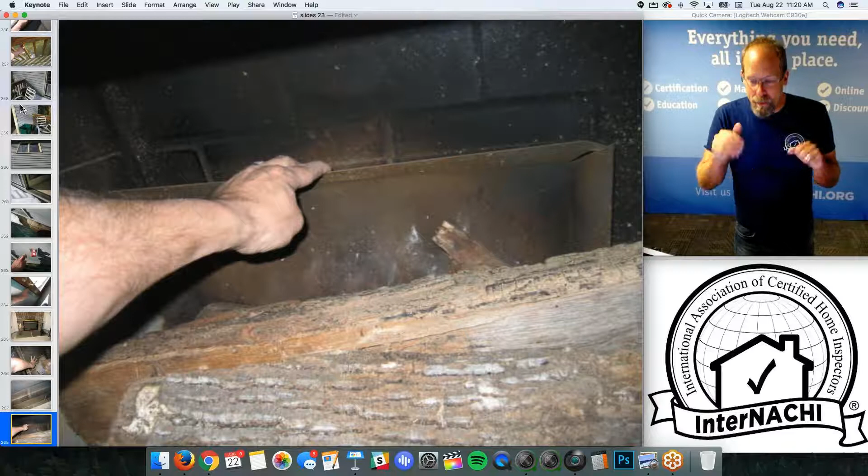There's the fireplace - remember, on the roof I identified the fireplace flue, so there's a fireplace there. You're required, according to the standards of practice, to open and close the flue damper. I take a look at the masonry - this is a masonry unit, so I'm looking at the brick, the mortar joints, looking for any cracks. There's a shield to reflect some of the heat back into the system, but if there's a shield and I can pull it back, I'm going to take a look behind there. I don't want any holes in the masonry of the firebox. The floor looks good, and there's the damper, the doors, the hearth, and the clearances.

Looking good, I'm in the kitchen. This is easy - I turn on every appliance, shut them all off, even run a short cycle with the dishwasher. If it leaks, that's great - I didn't break anything. If it leaks, that's awesome, you found it, put it in the report. Garbage disposal turns off and on.

Receptacle, I don't like the trap. It's kind of like an incline P-trap, so I don't want that.

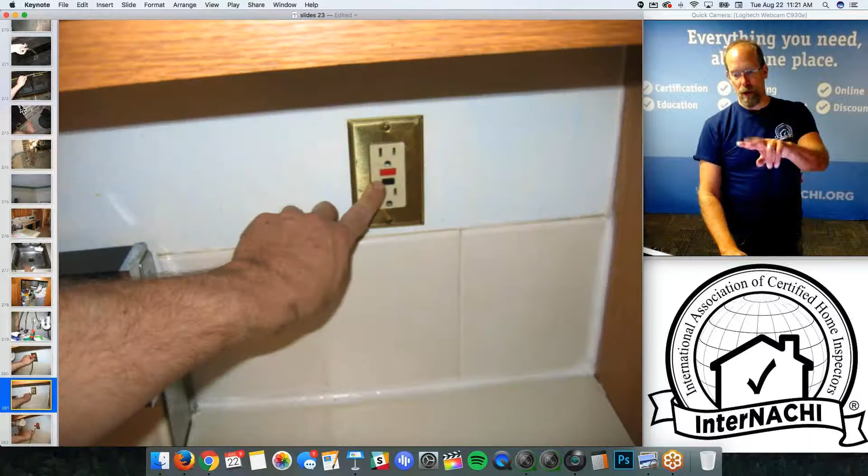GFCIs, that one doesn't work, so this one works but that one doesn't, fingers crossed. Run the dishwasher, interior, open and close the drawers, that's about it, then run a short cycle. The stove, oven element didn't turn on.

That's it, that's my home inspection for that house. Do we have any questions?

Gregory asks, do you prefer a checklist or narrative report? Narrative, but it doesn't matter to me, right? It really matters to your client. Nowadays your clients expect to read sentences in paragraph form with no spelling errors, good grammar, and pictures. They don't quite yet expect to see video, but I think that's going to be the new trend.

So what you can do is, if you're trying to decide whether you should do this or that in your service, you can always ask. Why don't you ask a couple past clients, do a little survey, follow up with them.

What I did was, a lot of my business came from real estate agents. So I wanted about 30 real estate agents for every home inspector in my business with good relationships, because that kind of filled up their calendar. Half of them closed every month on a house, so that was good business.

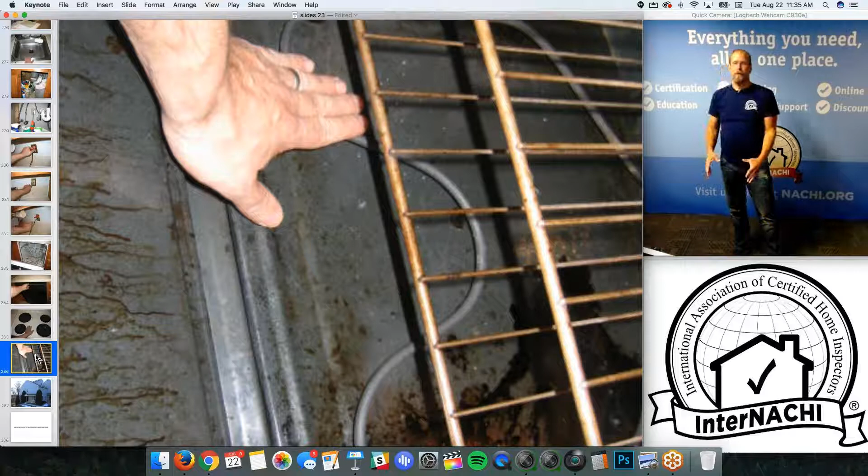Federal overrules that, right? I'm not sure what you're asking, Douglas - that may have been in reference to some other slide, but it's actually state. So local overrules Fed, right? If your state regulates home inspectors, it doesn't matter what InterNACHI says. The state of Texas, for example, regulates home inspectors, and they have to follow standards. New York has a standards of practice just for home inspectors, a code of ethics just for home inspectors, and they're slightly different than InterNACHI's.

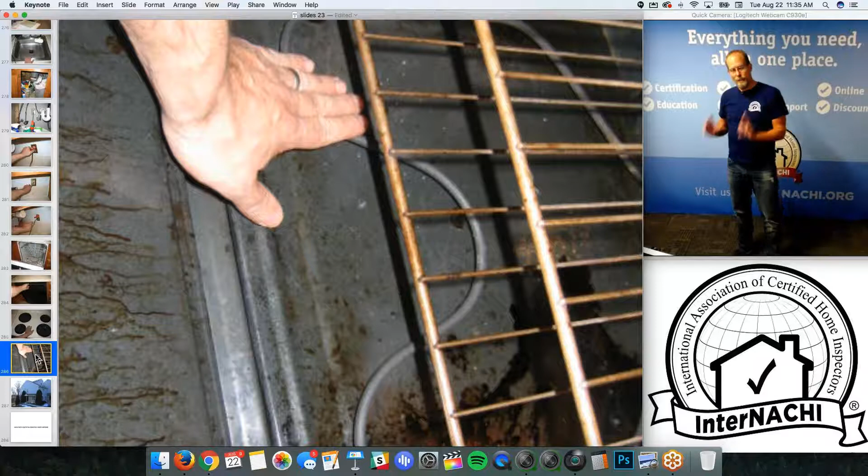So state overrules national - follow your local rules. I think I'm going over the other questions. I see a lot of them, and that's exciting. I'm going to copy paste all these questions, stick them in an email, and send out an email with all the answers. If I can't do that, please email me your question again, okay?